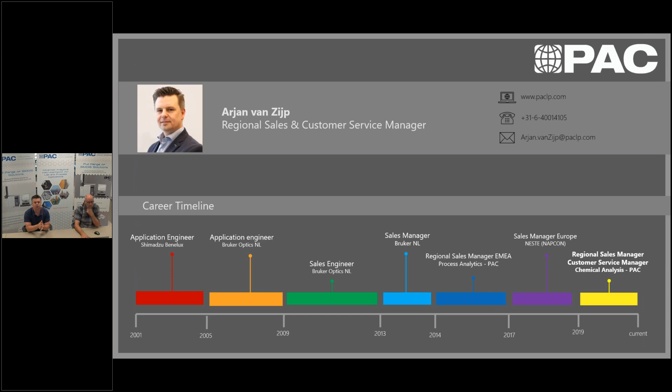So let's start with myself first. So my name is Arjan van Zijp. I'm the regional sales manager and customer service manager for AC Analytical Controls and PAC. I'm now in the business of sales already since 2001, and I've worked for several companies like Shimadzu, Bruker, PAC in the past for process, Neste as a refining company, and now since the last 4 years already back with PAC with the responsibility of the GCs and elemental business.

Of course, my dear valued colleague next to me, Theo Boekee, he has got a very long career timeline already, starting to work in 1983, but already almost from the beginning, 1992, till now at PAC in different roles. So this is my valued colleague where we definitely lean on. He's very experienced in all the applications, and therefore now, when he moved from support manager as well as sales manager, he's now in the new role as application support manager, helping me, of course, Gianluca and his team, SRA, but also you with all the applications that can help you drive your business.

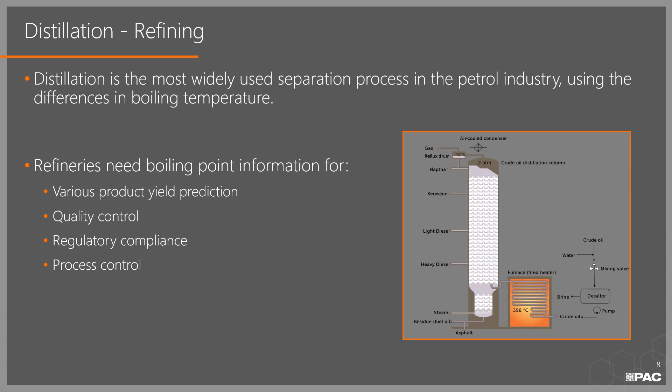And if you look to PAC, that is not only AC Analytical Controls doing the chromatography solutions, but we also offer online instrumentation and physical property testing. So we have all kinds of distillation technologies in-house, meeting your requirements and needs. This session will be about simulated distillation.

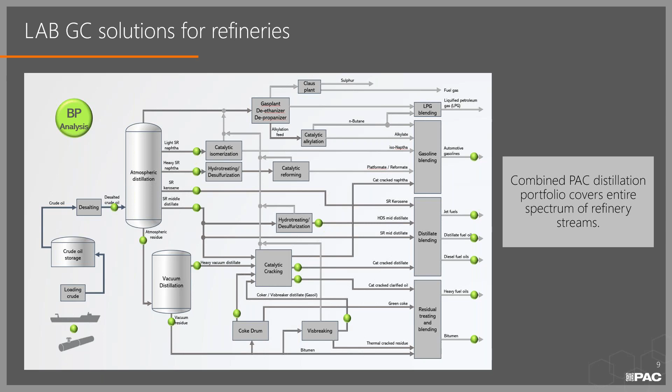Well, if we go back to the crude oil distillation, and this might be a bit of a complex slide, basically what it shows is that if you have the boiling point distribution of a crude, the refinery distills it into further fractions, and each fraction has its own value, its own price. And of course, we all like to maximize the margin, so you like to produce as much of the most valuable products, stretching it up to its limits.

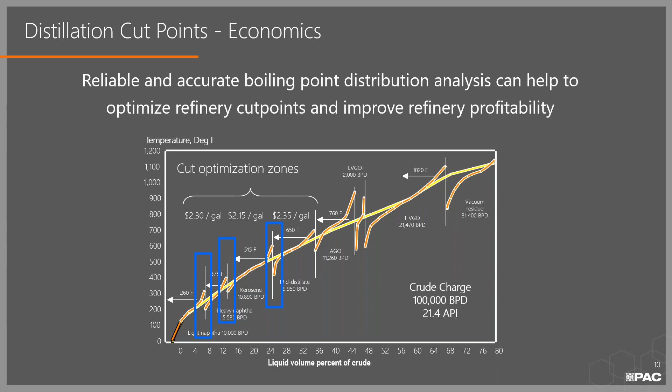And to do that, you need to know how much you can get from such a product from your distillation. Here is the example where the crude is separated into the naphthas, the kerosene, the mid-distillates, the VGOs, and what's left is of course the residue, each having its own price.

To predict, and that's this example where we show a boiling point distribution of a crude oil, and often the 90% point is of big value. I'm not going into the details of the numbers, but a 1 degree optimization can impact this point, for example, 0.7 volume percent in this typical example, which has a value and a huge impact on a yearly basis by increasing the range or optimizing the range, and thereby earning money.

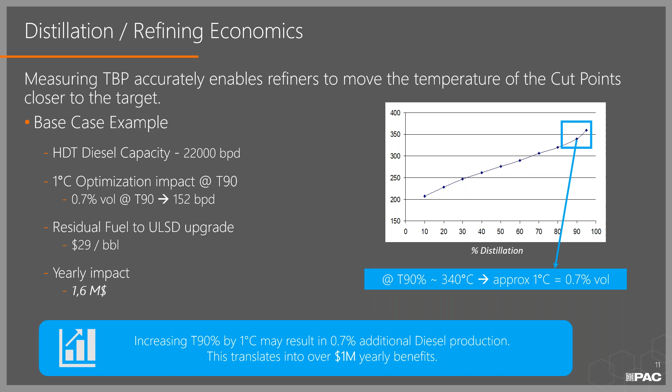Well, what does SIMDIS have to do with this? If you are able to analyze in a very accurate way, you're able to tune your process in a more accurate and a more profitable way. If we look at an example of results from our SIMDISes, what you see here on the left is the graph where the red line represents the reproducibility of one of the typical methods, ASTM 2887 for mid-distillates, and the blue dots represent the results from a round robin that we organized 10 years ago, where over 60 customers using our AC SIMDIS participated. The data from that round robin is shown here in the blue line.

That means we can prove that our installed base is capable of analyzing far within the method reproducibility. And that is, of course, not only reproducibility, also repeatability, which is of great use for you in optimizing your process and defining the product specification. The graph left and the table right are the same numbers. So you can see on every point our installed base is performing better than what the method is demanding. So far about the economics.

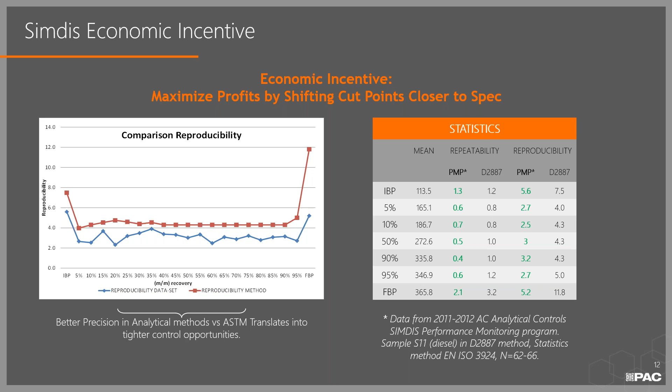I already mentioned that as PAC we have a wide range of distillation products. If we look to SIMDIS, and I'm going to explain later on what SIMDIS means, we have what we call regular SIMDISes for different types of products: gasoline, mid distillates, and high temperature for heavier products. We have in our software the ability to correlate results from our SIMDIS or DHA to D86 boiling point distribution. Those are the correlations listed here. We have a dedicated configuration where we use high temperature SIMDIS in combination with a DHA front end for detailed and accurate boiling point distribution of crude oil.

And last but not least is what we call our CNS SIMDIS, where we do boiling point distribution not only for the product itself, so carbon, but also for the nitrogen and sulfur that may be present in those products, which is of great use later on to figure out where the sulfur is in my product and what that means for desulfurization and product spec. We are limited in time, so I will not talk more about the CNS, but should there be interest, we can schedule a separate session for that.

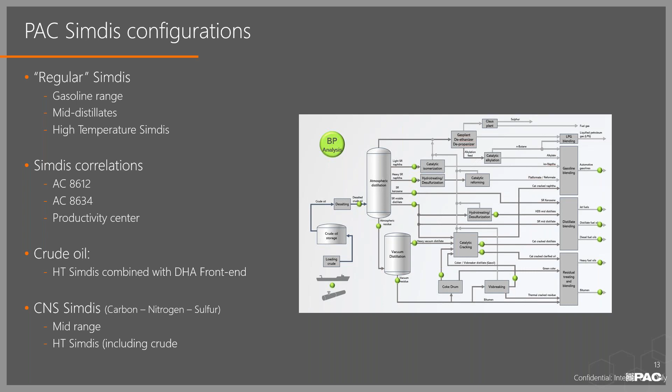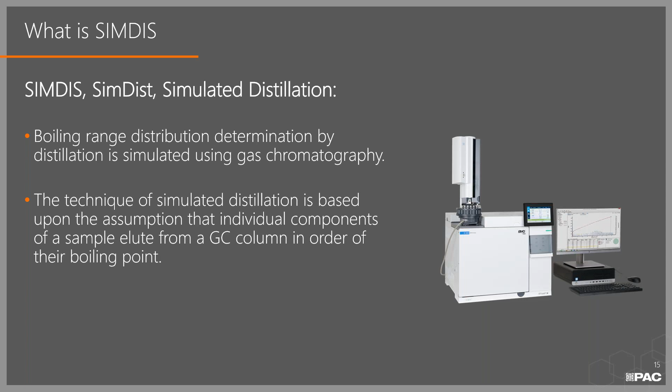Okay, let's get more technical. What is SIMDIS? The full name is simulated distillation. Basically we determine the boiling point distribution of a product by using gas chromatography. The basic concept is that we assume a sample introduced on a column elutes in its boiling point order. That's shown here in a bit more detail. From left to right, we introduce our sample through a dedicated inlet, the TPI, temperature programmable inlet, for a gradient introduction of the sample into the column. There is no splitting, no venting whatsoever. So, depending on the type of SIMDIS, what you introduce goes into the column. No discrimination here. More about that later.

Separation takes place on a non-polar methyl silicone column, programmed at a linear rate, so the sample elutes in increasing boiling point. What comes out of the column is detected by an FID, which is a mass-dependent detector. So you get a graph, which we will show you, and from that graph we calculate the boiling point distribution based on a calibration analysis. On the next slide you'll see this explained more graphically, where at the bottom right you see a typical diesel chromatogram.

Graphically represented like the triangle here, the retention time runs from left to right, and that's the signal. If we take the total area and assume this to be 100%, we can cut it in certain fractions and calculate 1, 2, 3, 4, 5%, each eluting at a certain retention time. Based on an analysis of a mixture of normal paraffins with known boiling points, we know the retention time relationship to the boiling point. That's the calibration curve you see here. So then we have percentage related to boiling point, and that is, in the end, the result you get from a distillation.

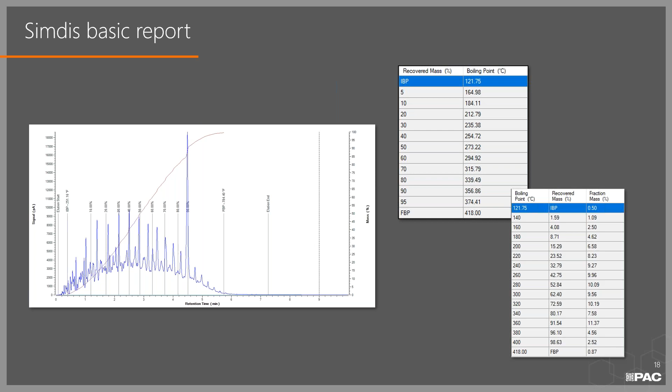There are a lot more products to be analyzed on SIMDIS. I showed you the refinery diagram. Here are some typical chromatograms from all kinds of products analyzed on the SIMDIS. So from gasoline, jet fuel, diesel, up to heavier products like vacuum distillate, or even crude oil, FCC feed, and even residual samples.

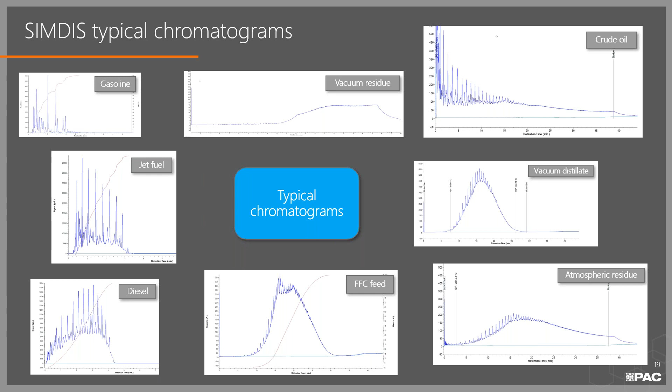A small remark about the residual samples. They do not elute for 100%, and we calculate the results accordingly. We'll come to that later. So it covers the whole range of products present in a refinery. That cannot all be done on the same device. Well, having said that, yes, it can, but there is a difference in that.

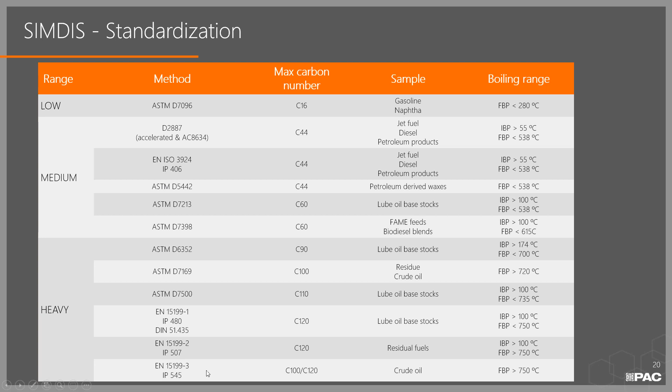Before going there, here is the standardization applicable for SIMDIS. A lot of methods from ASTM, EN, DIN, IP, etc., covering a full range of products from gasoline to crude oil, including the residual fuels, all with their own initial boiling point and final boiling point. Typically in Europe this one is used for the jet and the diesel, and for example number 3 for the crude oil, which we'll talk about later.

The differences between all those methods. Let's first say not the differences, but the similarities. The similarity is the technique. Sample is introduced through a direct injector, the TPI, going into the column, eluting in boiling point order, detection by an FID, and at the end, the calculation. That principle is the same for all these methods.

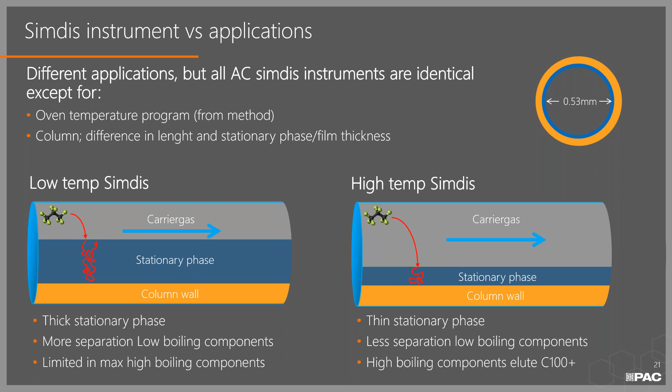So to summarize, SIMDIS is a technique based on the same concept, components eluting in boiling point order from a column, and the column is the difference for the different SIMDIS methods, and that results in a good separation.

A little more about standardization. You may wonder whether SIMDIS can be used for a final product specification. If I focus on the European methods, you see that, for example, the EN 590, the diesel specification, is listing the D86, or the ISO 3405, but it mentions that correlated data from SIMDIS, and they call it predicted data from SIMDIS, can be used to specify the diesel. It's not the referee method, but it's allowed to be used.

And we'll come to more details about that later in the presentation. And that's the same for the DefStan for jet fuel, the same story. It allows correlated SIMDIS data, and more about the correlation later on.

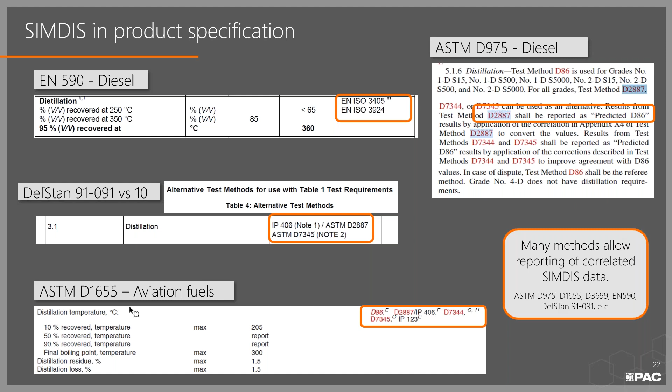How does SIMDIS compare to physical distillation? Well, by physical distillation we mean, for example, the OptiDist, where we do atmospheric distillation, but that can also be micro distillation or vacuum distillation. Another technique is the true boiling point, the 15 plates, ASTM D2892, and then of course the SIMDIS, which is true boiling point data. More about this.

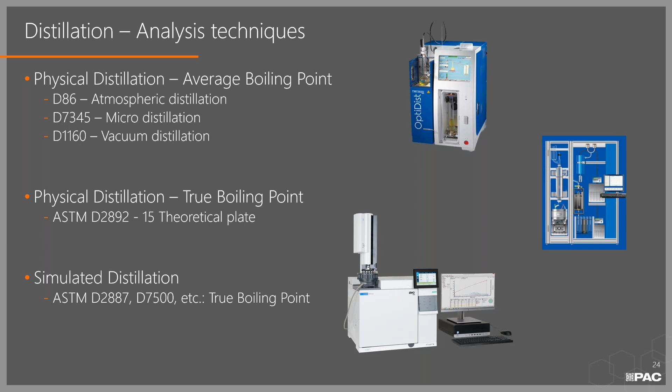If we look at D86, and this is a very old picture of course, what you do is you fill a distillation flask with your sample, you apply heat to it, the sample starts to vaporize, rises to the neck of the flask, and then condenses into a metering flask. That is a one-step distillation, a one-plate distillation. So one time from liquid to gas and from gas to liquid.

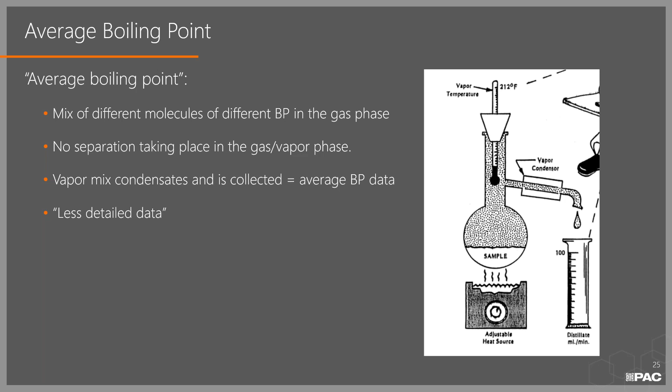Thereby the separation taking place is not that accurate, and that's why they call it an average boiling point distribution. The data is less detailed because of the one plate. If we go to the 15-plate, what's already in the name, there are 15 plates, so your separation is already better than on the one-plate distillation. If we start comparing, and that's already here at the bottom line, to a GC column

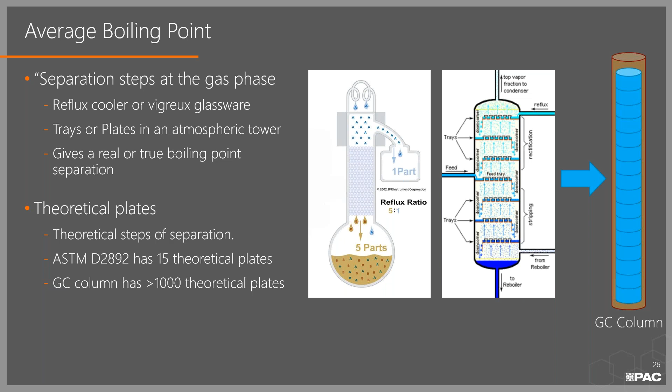used in SIMDIS, the quality of columns in chromatography is often referred to in the number of theoretical plates. And there's the word plate again. From the 15 theoretical plate system to the average boiling point being a one-plate system, a GC column has easily far over 1,000 theoretical plates. That means the separation is much better, and therefore the industry calls SIMDIS the true boiling point data, because it's a very good separation taking place.

One of the other differences of the TBP, true boiling point, versus the physical distillation is that you can go up to higher temperatures. We can run, as you have seen, residues or crude oil and provide data with a final boiling point up to 750 degrees C. There's a high level of automation on a GC. You can put an auto sampler on there and you can run sequences unattended overnight.

Looking at the standardization methods, the reproducibility and the repeatability of SIMDIS is very good. And another argument for true boiling point for SIMDIS is the speed of analysis. Maybe not so much for high temperature SIMDIS, which can take up to 45 minutes, but jet fuel and diesel can be done in less than 10 minutes, automated, unattended.

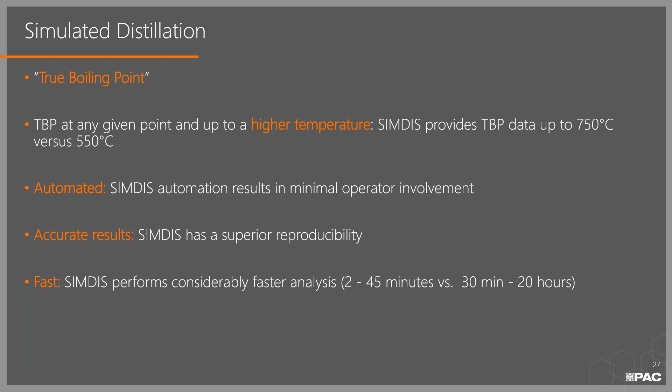If I summarize, the differences between the physical distillation, the D86, compared to SIMDIS is that physical distillation reports boiling point versus volume percent. You measure the volume condensing in the metering flask, whereas SIMDIS reports versus mass percent, because we detect what comes out of the column by an FID. Physical distillation is an average boiling point of a mixture at a given point, and SIMDIS is true boiling point.

Speed of analysis was mentioned. The amount of sample used in SIMDIS is less than physical distillation. The product range, the scope of SIMDIS, is also wider than in physical distillation. And last but not least, it has a high safety standard. For a couple of reasons, there is no risk of catching fire by breaking flasks. You work with far less sample, so there is less emission of vapors in the lab and so on.

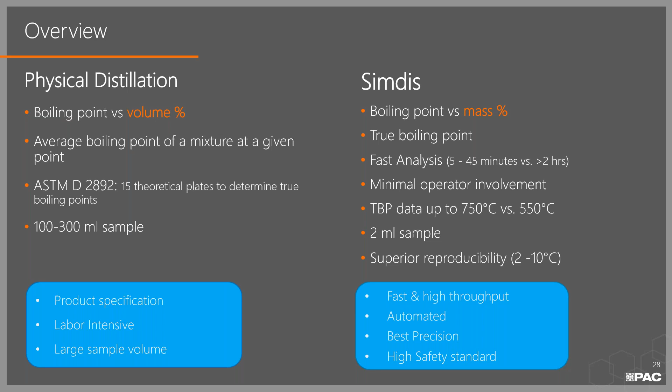Well, so far as introduction, let's look at how we do it. How does SIMDIS work? Let's look at the hardware, and the software later on as well. So what do you need to do SIMDIS? You need a GC, you need an analyzer. We don't call it a GC, we call it an analyzer because we deliver it as a full package.

That system needs to have an inlet. We use the TPI. It needs to have a non-polar boiling point column for the separation, depending on the method which type of column you use, and it uses a detector being the FID. And of course, not listed here is the auto sampler to introduce the sample in a repeatable way. Then you need some software to do the calculation. That's the CDS, the chromatography data system, often ChemStation or OpenLab, and whatever other packages may be around, and dedicated SIMDIS software, which takes the results and processes them accordingly. And I will give you a demo later on.

Last but not least, you need to calibrate the system. I've shown you the normal paraffin mixture. You also need to check the response and the system performance by using a reference oil. There is other reference material available as listed in the methods, helping you to check whether your system performs as it should and whether it meets specifications, so to say.

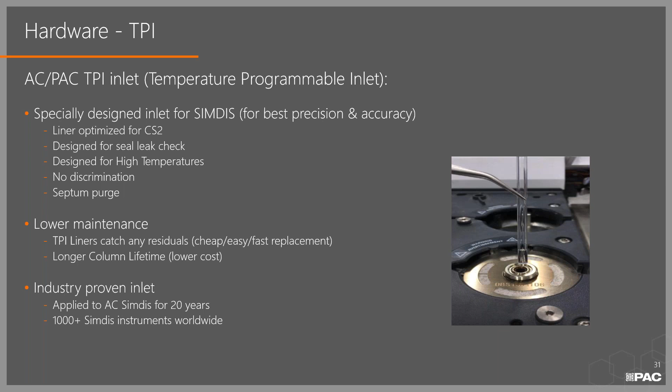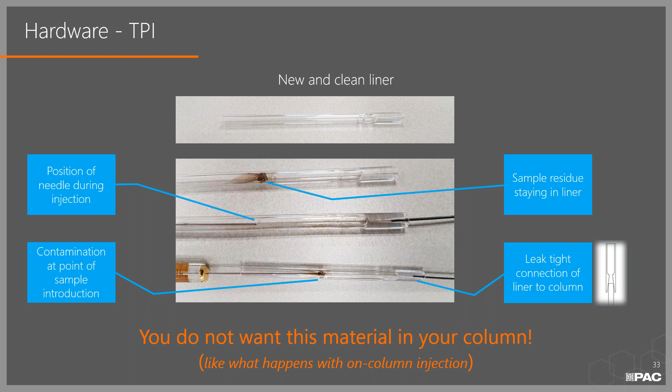The septum purge. What happens when you introduce your sample? The syringe goes in, the plunger goes down, and you get a spray of the liquid in the liner, where it evaporates, and it pulls out very quickly. There may be some droplets of the liquid on the needle, and when the needle withdraws itself from the septum, it may clean itself on the septum, and the septum is cold, so that product may be introduced in the column at a later stage.

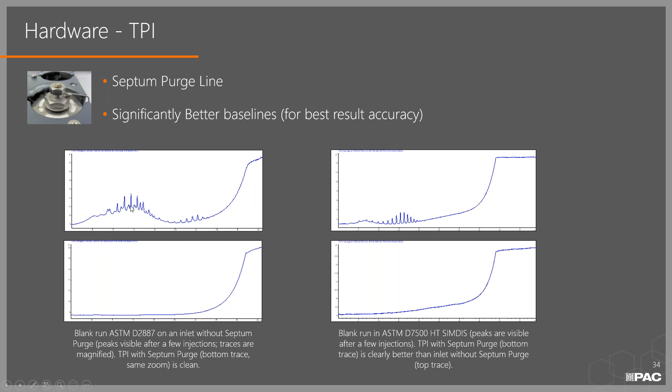Another nice feature about our SIMDIS is that we modify the autosampler that we use for high temperature SIMDIS specifically, and we call it optimized for light solvents. You can imagine that with high temperature SIMDIS you go to oven temperatures of 430 degrees C, same for the inlet. So there is quite some heat accumulating on top of the GC, especially the point where the autosampler stands, and the sample taken into the needle hanging above the hot area may result in evaporation of the solvent.

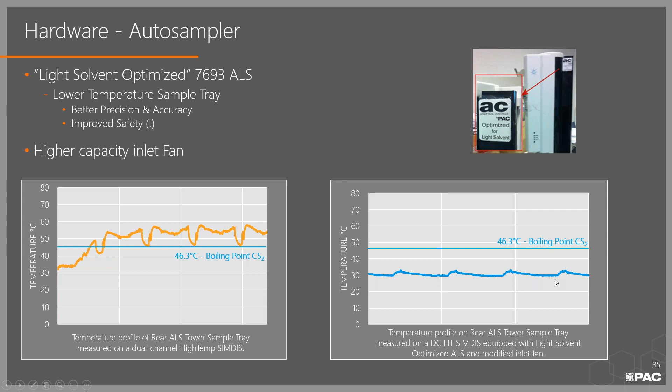Looking into the columns, so we have the autosampler for the introduction, then the TPI bringing the product into the column. The different columns I already mentioned, the difference is in the dimensions, the film thickness and the length. And here just shown typically columns used. And we always use stainless steel capillary columns, which have a much longer lifetime, especially for high temperature SIMDIS, where you go to very high oven temperatures.

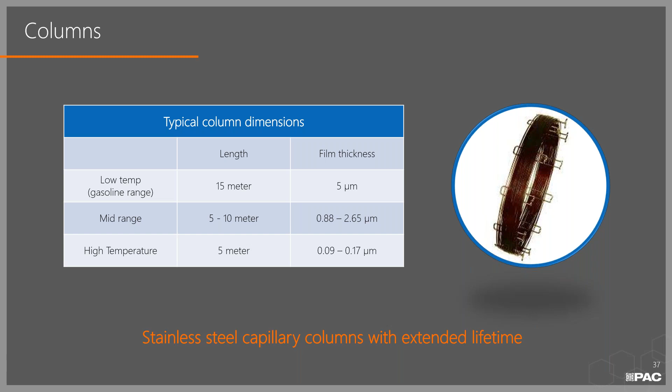Then last step is the calibration and the quality control samples. I mentioned that we deliver the whole package with the instruments, and that is calibration material, reference material, and quality control samples with consensus values based on interlaboratory studies. And every SIMDIS we deliver is delivered with a set of samples, depending on the method implemented on the system. So far about methods, standardization, hardware, etc. Let's move on to correlations and crude oil distillation.

But maybe, Arjan, are there already any questions in the chat, or Gianluca? I'm checking, but maybe Laura and Gianluca can answer, so you can take a sip before that. That's why I asked. Yeah, not yet.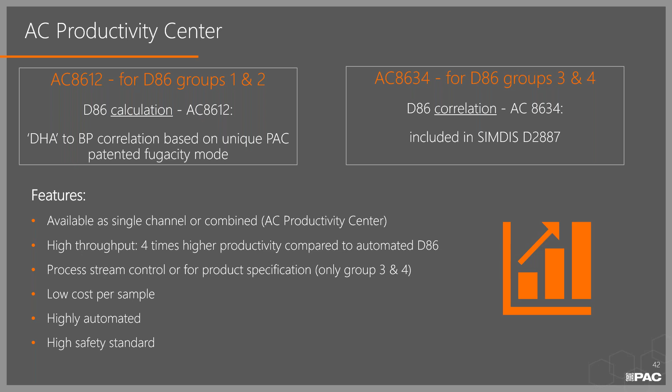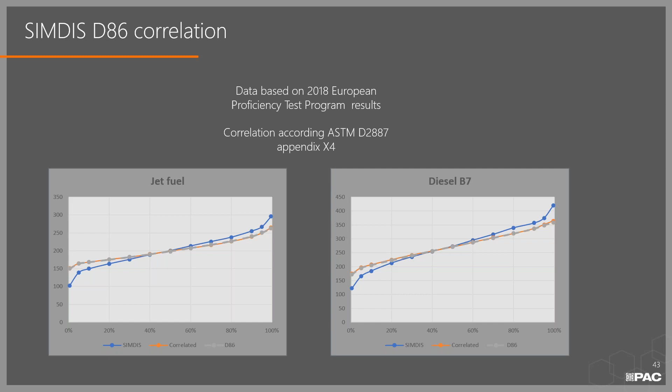Yes. Here an example of the correlation where you see two graphs, one for the jet and one for the diesel B7, so having a 7% bio component in there. The blue line is from the SIMDIS. That same sample has been analyzed with D86, and then the correlated data is shown in the orange lines. This is just an example. We regularly check this based on the various proficiency testing programs that we join. We join the one from ASTM, we join the European one, and for every analysis that we do, we check this, and we always get very nice results. And therefore, you can imagine it is allowed to use for product specification.

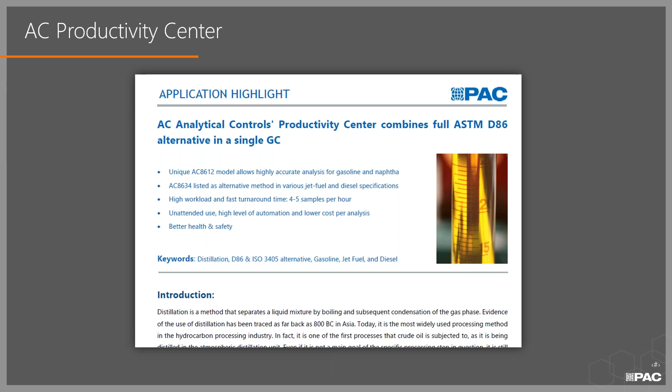Moving on to the next topic, which is high temperature SIMDIS and crude oil. By the way, I could have talked about how gasoline SIMDIS analysis works, or how regular mid-distillate SIMDIS works. We are limited in time, so I've taken just a few highlights from our portfolio to show what we are capable of doing and offering to you. So we now go to the far right end of what can be done in terms of SIMDIS in boiling point range, really heavy products.

And well, why would you analyze crude oil before you maybe even buy it? Here an example of two different crudes, the Alba and the Forties, where you can clearly see that the Forties has a lot more light products, naphtha, versus the Alba, which is for more than half very heavy, having resids. So this is probably a more costly crude, but you'll have a lot more value you can get out of it.

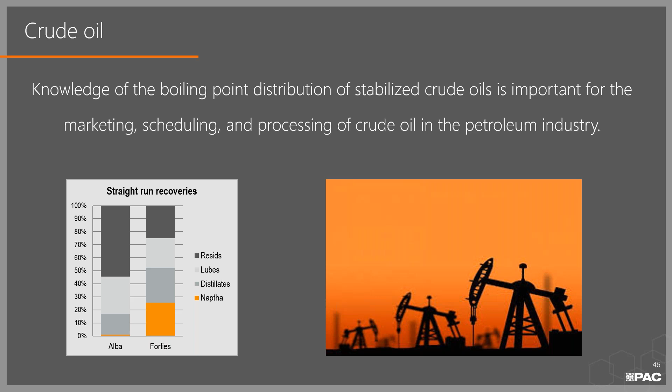Briefly, what is high temperature SIMDIS? SIMDIS, as described before, is boiling point distribution on a capillary column. But it covers a wider range. It can go up to C120, which has a boiling point of 750 degrees C. You can do crude oil on it. You can use it for residue type of samples, but also for lube oil, etc. Further slides will focus on crude oil analysis.

I showed you the picture of the liner where you could clearly see that the residual asphaltenes, for example, stay in the liner. That means that not everything is eluting. That means we cannot report up to 100%. So we do a calculation of the recovery of such a sample, and we compare the results to the found recovery. And for recovery calculation, we use an external standard, being the reference oil.

For high temperature SIMDIS, very heavy products with a high final boiling point, we use very thin film columns. We by default use the 0.17, but we can also provide the 0.09 film thickness. You need to dilute your samples. That has a couple of reasons. A very practical one, the viscosity of the sample. But another one is the column overloading because of the very thin film thickness. You simply will not get a good separation.

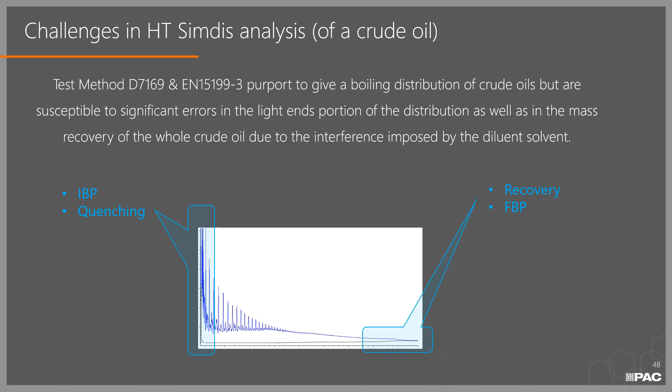Looking at standardization, there are two methods describing the crude oil analysis. That's the ASTM D7169 and the EN 15199-3, describing how to do this. And there are some challenges in there. You see here a chromatogram from a crude oil analysis, and the challenges are marked in the blue boxes. That's the initial boiling point and the quenching from the solvent, more about that, and then how to calculate the recovery and the final boiling point if there is any.

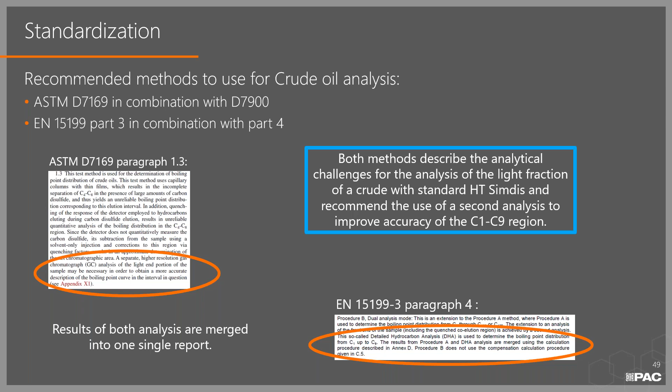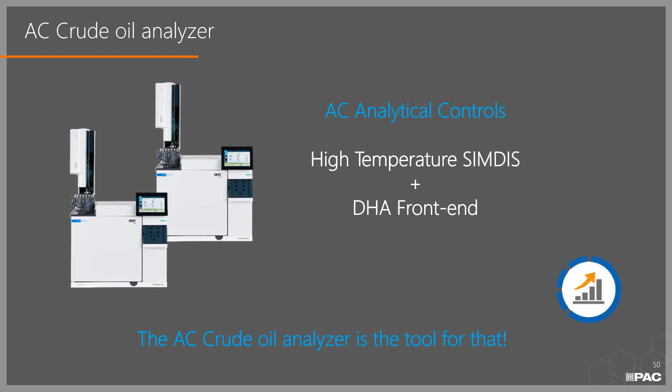Well, back to standardization. Both methods, as mentioned before, have in the scope in the initial paragraphs something about using DHA, detailed hydrocarbon analysis, for the light fraction of the crude oil, thereby improving accuracy of the analysis. And that is where the AC crude oil comes into place, being two analyzers. Be aware, two analyzers, one high temp SIMDIS and one DHA front end or DHA combi, more can be explained later. And that is the one that is recommended to use for crude oil.

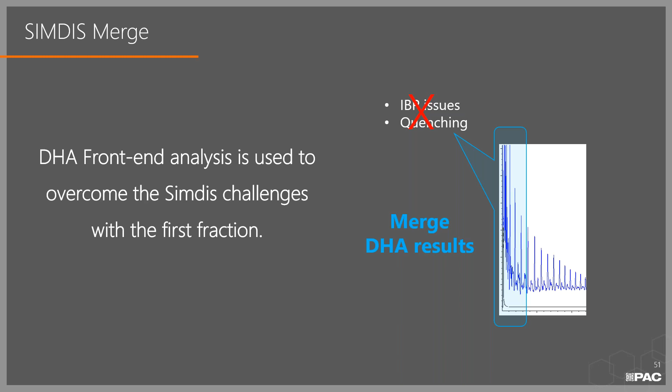If we go back to the picture of the first part of the crude oil, I mentioned potential issues with initial boiling point and quenching. Well, the DHA is taking care of the analysis of this fraction. So those two issues do not exist anymore when you use a DHA front end. How does that work? So a small sidestep from SIMDIS to DHA. We analyze the crude oil on the DHA front end according to the two methods as shown here in the graph.

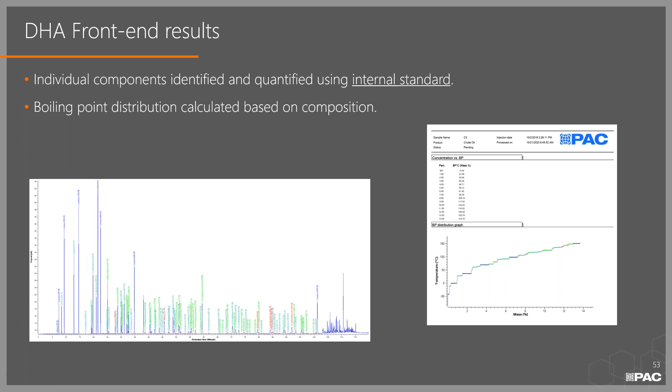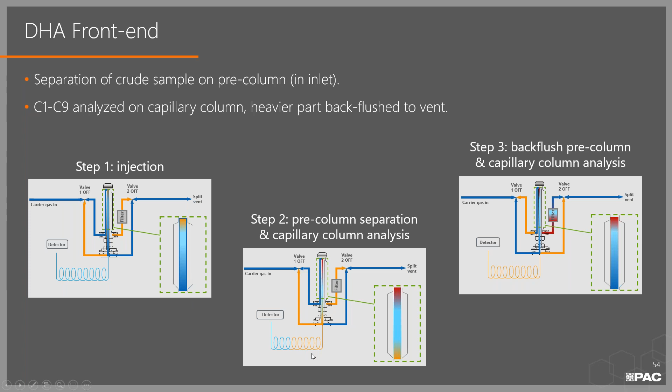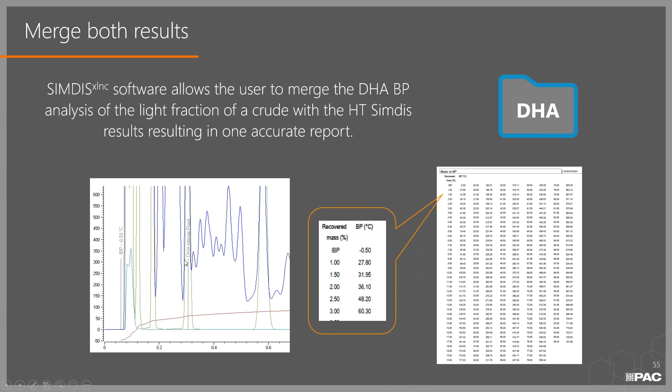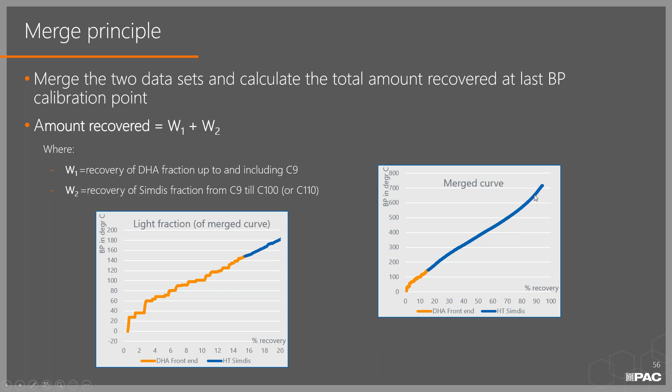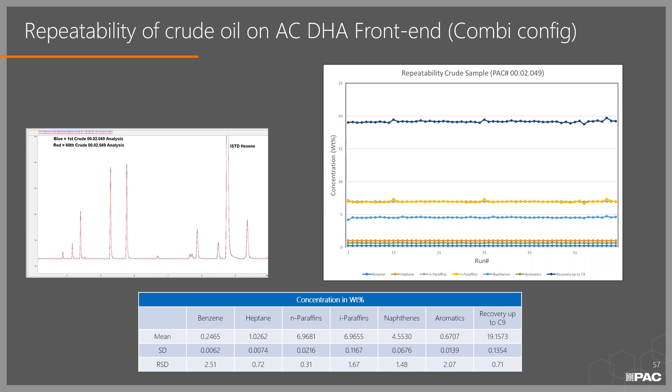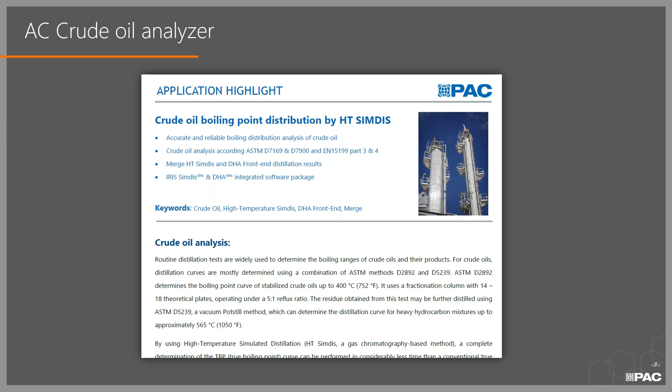The repeatability of such a configuration is very good, as shown in this graph, where we have done up to 60 analyses, and you'll see the DHA front-end repeatability is excellent with RSDs for the recovery less than 1%. And also for this one, we have a nice application note or application highlight, which we can, of course, share with you. Be aware, this technology is based on standardization.

I'm not sure if you recall one of the first slides from Arjan, who told you that we pioneered various methods. Well, this is a method pioneered, designed by us, and is now covered by global standardization. And you merge the results from two analyses, giving you an accurate and reliable boiling point distribution for your crude oil. Two analyses, one result.

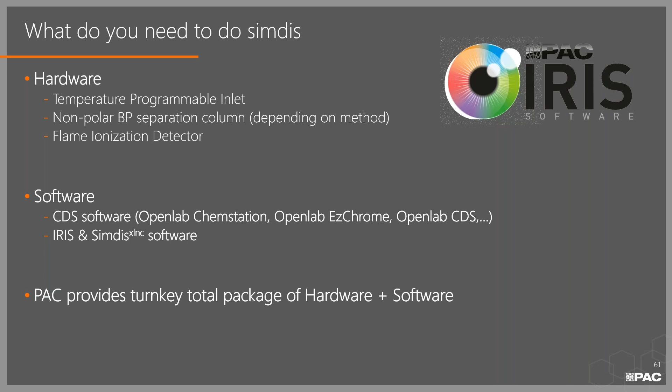If we go to the last part of my presentation, that is about software. I mentioned that you need hardware, and I mentioned that we need software. Our software package is highly automated. You start your analysis in your chromatography data system, and everything from there on will go automatically. And we call it a workflow-oriented application. From starting the analysis, which you have to do yourself, till final result reporting, and even export to LIMS can be executed automatically. Should you want to take more control of it and do it manually, then that can be done as well.

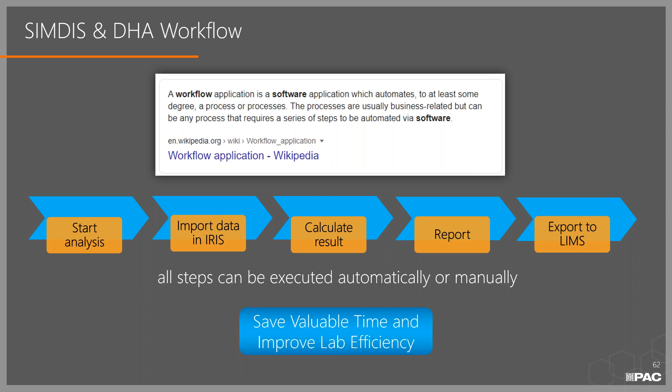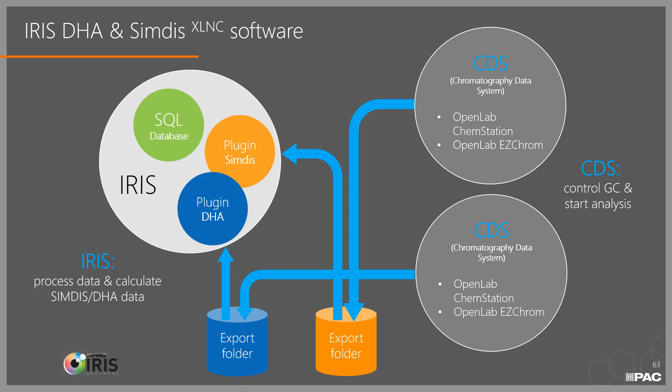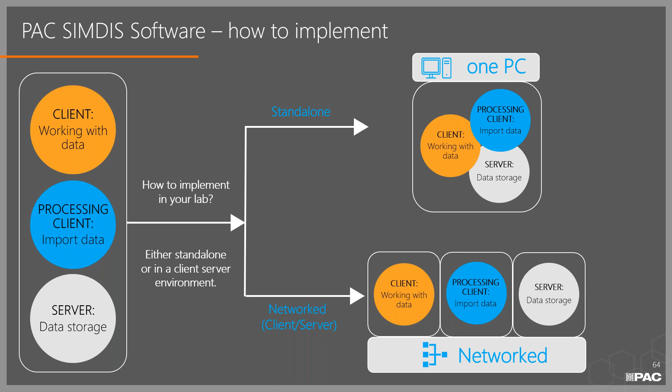The chromatography data system is controlling the GC, is doing the injection, is doing integration if needed, etc. And results are exported, and our software picks it up and processes it accordingly. That can be done either in what we call a standalone configuration or fully implemented in a networked or client-server configuration, where you have your data secured somewhere on a server, and the users in the lab or at the office desk can work with the data. All kinds of options available there. Brings me to the last step, showing you a brief demo of the software.

Yeah. While starting up on that, maybe Arjan, you can check if there are any questions. I'm checking, but I don't have a good view. So it's Laura and Gianluca. Gianluca, are there any questions coming from the audience? Not for the moment. Yeah, I had two questions, but maybe we can work on that at the end. Why not? Or there's a question correlated to the last topic you talked about. It is about the

merge. So the question is about the ASTM D7169 method, so DHA front end and SIMDIS merge. The question is, is there today a certified reference currently available which allows, like in the other methods, to verify the performance of the analytical system? I remember this was a topic at the time I installed the instrument, DHA and SIMDIS merge. To my knowledge, not, Fabrizio. No, not that I can recall. We can check the same for you, for my knowledge too.

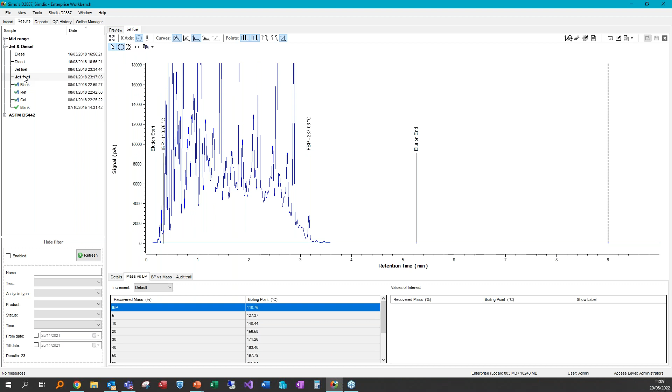If I go to the first one, if I double click on it, you see it opens. And you get a lot more information. You get, of course, your chromatogram, where you see the elution start is defined, the elution end is defined. The definition of those two is as per the method used. And from that, IBP being 0.5%, FBP being 99.5% are defined. And you see if I hover over it, you see the results.

And if I click on this icon, you see the red line represents the boiling point distribution of this product. And that is what you see in the table below. You see here the points and the found boiling points. And you can do it the other way around, so boiling point versus mass. You can say I want to see it per degree or per 10 degrees, whatever. This is all user editable, and you immediately see the results.

Not configured on this one, but I seem to recall I have it on some of the others. No, maybe this one. Yeah, you see here the results from another type of product, and I've entered a value of interest, in this case, just as an example, 95%, and you can enter more of them. And you say, I want to see where is that in my chromatogram. That's at that point. Just to show you the ease of it.

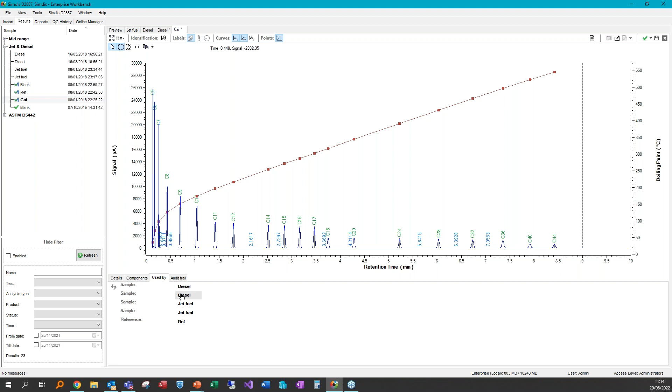Going back to the diesel, I can do it like this, or I can say which of the samples are using this sample. So that's a cross reference from sample to the calibration used for it, or the other way around: I have a calibration, which samples are calculated with this. You could go back to this one. Yeah.

Correlation data available over here. Different correlations; in this case, only this one is set up. You can report according to ASTM, the points requested by the method, or you can say I want it just every 10%. Same for the cut points, boiling point versus volume. Volume in this case, because it's correlated data. If we go here, it is mass, just as a reminder on the difference between the two.

And in this way, you can, I would say, play around with your data. You can preview your results. You can export to LIMS automatically. You can save the results as an Excel file, and so on and so on. Just to give you a kind of feeling of the capabilities of the software. Just the last few things.

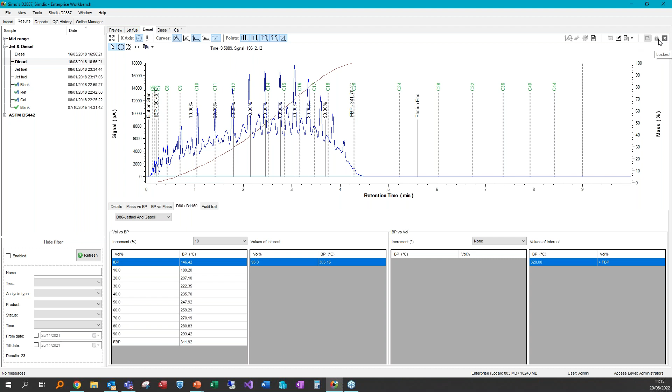This one is calculated with a certain blank. Should you not be happy with the blank, then you can simply take a blank. That one is already in use. If I take another blank, put it on there. Oh, it's locked. I already saved this one, so I cannot edit it anymore. Then I have to unlock. If I take this one, is that one locked? No, this one is not. That one is available.

This one is available. So should I want to drag another blank to it, and say this one is already linked, so I take the other one, it will recalculate immediately with the other blank. Just simply drag and drop. I can spend hours on this, showing you all the other methods, etc. But as a kind of introduction, I think this for now is sufficient.

Yeah, and of course, Theo, if you have an autosampler on the GC, you can set up a sequence with a blank, with a reference, with a calibration, samples, and the software automatically treats the sample in the proper way. Yes, correct. I can show you that, but that will take another 5 or 10 minutes. Right.

Your analyses are started from the chromatography data system. The results are exported, as I've shown, and then based on the name, on the methods, etc., it will process it accordingly, according to certain rules which are defined by us and can be optimized by the user. It will even import solvent and sample weight for high temperature SIMDIS, for example, and calculate it accordingly. Yeah.

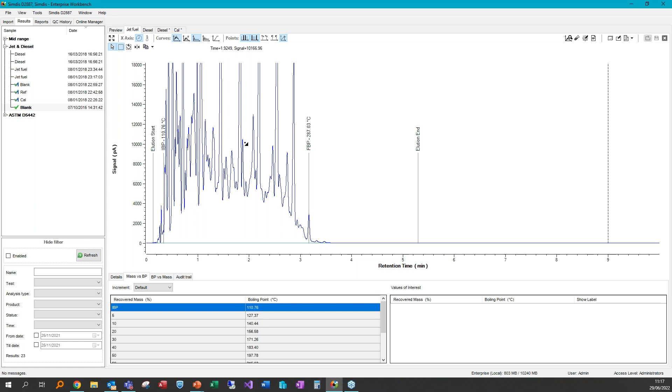No. Any other questions? Otherwise, I will go back to my... Have questions? Yeah. Okay, I can wait 2 minutes. I have a question, probably from a producer, not custom laboratories, for example.

Talking about correlation, you just introduced the word correlation in the first slides. The correlation I'm interested in is D1160, so vacuum distillation. The question is, is it still valid for all the samples that comply with the IBP and FBP, for example? Or are there limitations for some types of samples that include a lot of hydrocarbon groups that can deviate results or precision?

The answer is yes, and the answer is no. Okay, nice. I love this kind of question. No, but let me explain. I explained the D86 correlation for group 3 and 4, which is based on results from an interlaboratory study from ASTM. For D1160, such a thing does not exist. There is no proven correlation from ASTM or whatsoever.